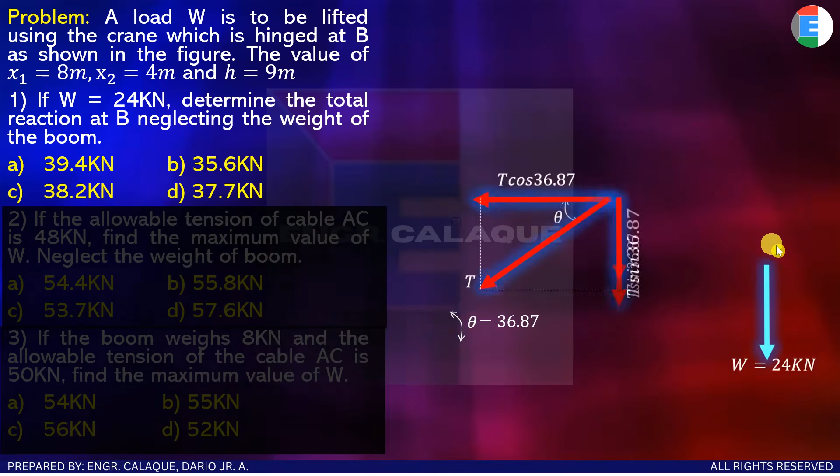So, ngayon, considering itong line na to, so magmo-moment ka dito, di ba? Kasi may mga forces man dito. So, para mawala lang yung mga forces na yan, dito ka na lang mag-moment. So, by summation of moment dito sa point B, ganun pa rin, no? Yung ganitong ikot, taken as positive. So, kumbaga, itong 24 na to, iikot yan with the same direction sa assumption natin.

So, 24 times 4, no? Pero itong T sine 36.87, iikot yan baliktad dito sa assumption natin. So, kumbaga, it should be taken as negative. Pero yung moment arm niya ngayon is itong 8 meters. So, meron kang negative ng T sine 36.87 times yung 8. So, I think wala tayong ibang force kasi itong T cosine 36.87 maka-cancel out kasi nag-coincide siya dito sa point B. So, kumbaga, ito lang yun, tsaka ito. So, pwede na tayo mag-equal to 0.

Then, we can now calculate the value of T. So, yung nangyayari, ito magiging minus, no? And then, ito 8 meters na. Then, matatanggal mo na to. So, mas maliit yung equilibrium equation mo, and then mas madali siya. Okay? So, 20 kilonewton. So, maraming way mag-solve ng ganitong problem.